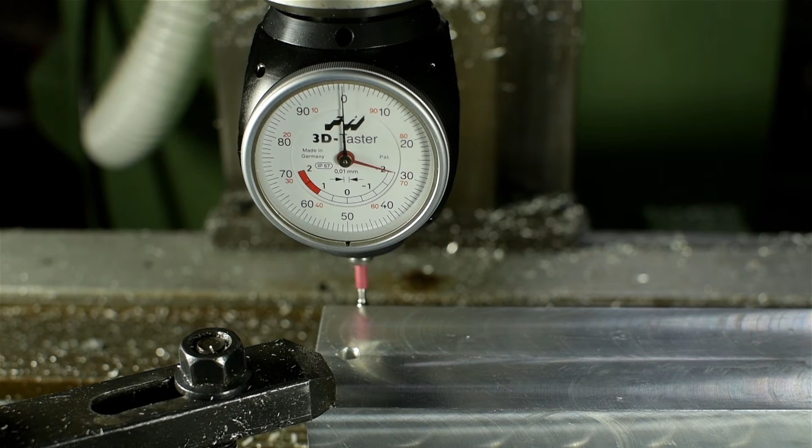Forget everything you think you know about working in the shop, because today I've got something that'll... No, wait. Scratch that. Don't forget everything. That could be dangerous. Let's start over. I've got a story for you. Intrigue and adventure, of betrayal and redemption, of love and...

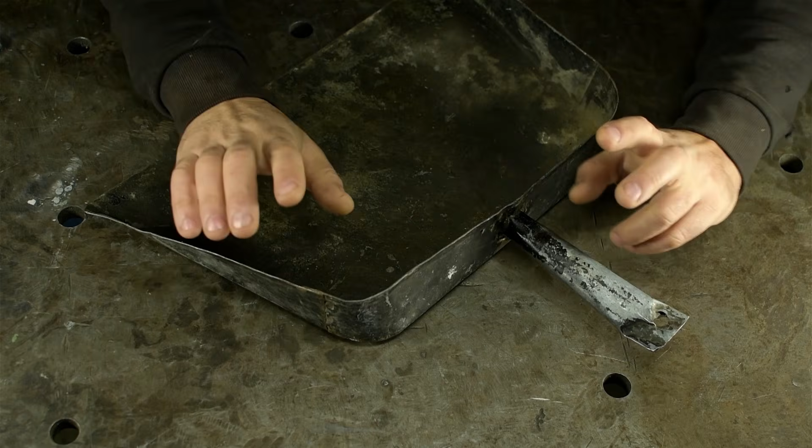It all starts with this very suspicious dustpan. And by suspicious, I mean not suspicious. I know, hard to tell just looking at it, but I made this thing a very long time ago. 10 years ago, maybe even 15. Sure, the handle's all crushed now and it's all dinged up. But when it was new, it worked great. I'd venture to say better than great.

Though, to this day, I still have no idea what on earth drove me to make my own dustpan and not just buy one. But, other than probably the half a day and $20 in materials it cost me to make, I don't regret a thing. Recently, I've noticed my garage hasn't been the tidiest. Frankly, it's a downright filthy mess. Now, at first, I thought it was the 15 simultaneous projects I have going on, or the fact that I don't clean up after myself.

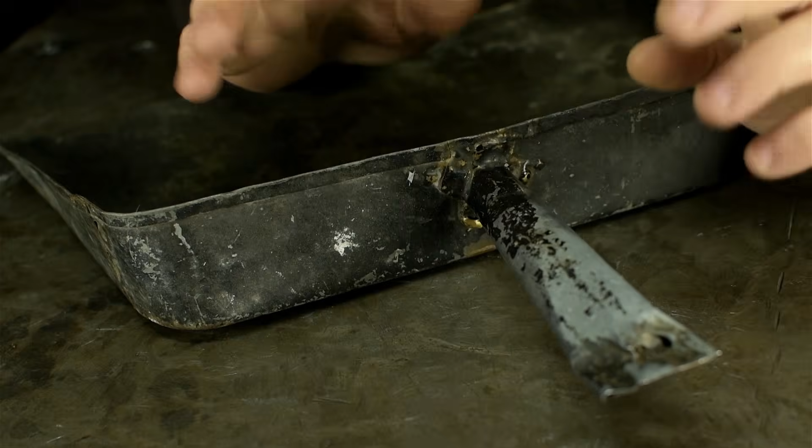But then, one particularly drunk Friday night, it dawned on me. My moment of clarity. My dustpan must be worn out and just not panning as well as it used to. Think of it this way, I've probably gone through 10 brooms since I made this thing, but never a new dustpan. It's simple math.

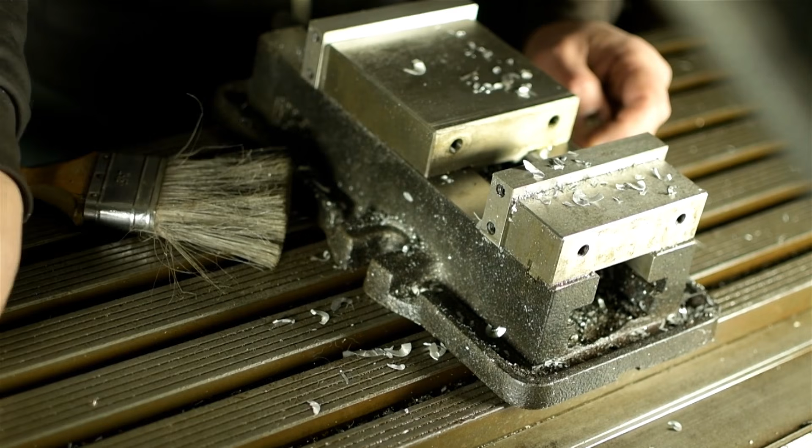According to my YouTube analytics, most of you might not remember this, but there was a time, and I'm not trying to be that guy, there was a time maybe 20 years ago or so when there was no internet. Well, a little bit of internet maybe, but it was for squares. Back then, there used to be these stores filled with books. If memory serves, they called them bookstores. Sure, there are still bookstores today, but they're not really bookstores like they used to be. They're more like cafeterias with really good waiting rooms.

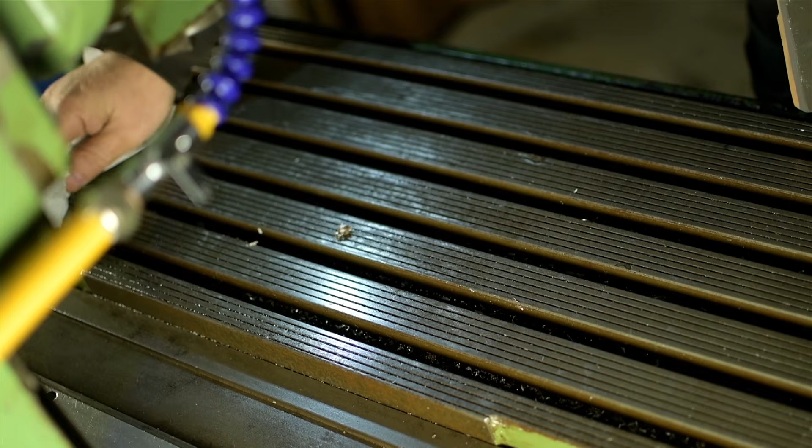The bookstores I'm talking about, you couldn't eat in. And drinking in one? Barbaric. If you wanted to drink something and read at the same time, you'd have to go to a 7-Eleven. And even there, you only had time to check the centerfold before they realized you were underage and kicked you out. In these bookstores, I'd usually gravitate to the same section. Well, after I checked if they had anything new in the fine art chapters of the photography books. You know who you are.

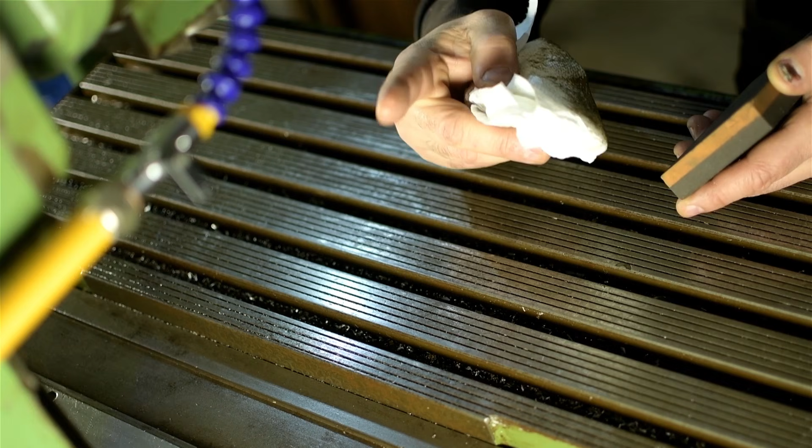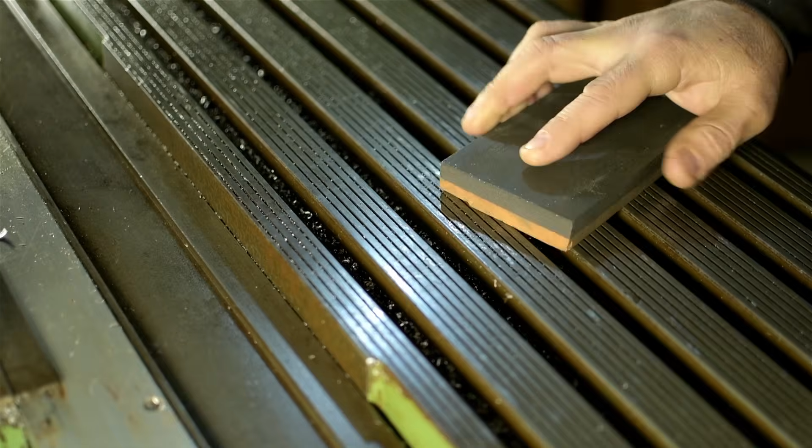I'd always end up in the science and technology section. I say section, but it was really just 2 shelves near the floor, if you were lucky. And no matter which bookstore you went to, it was always the same 4 or 5 books. There was always How to Wire a House Without Burning It Down. Superbly illustrated, of course. I mean, cover-to-cover hand-drawn screwdrivers and green terminals and cross-sections of living room walls. So it was that book.

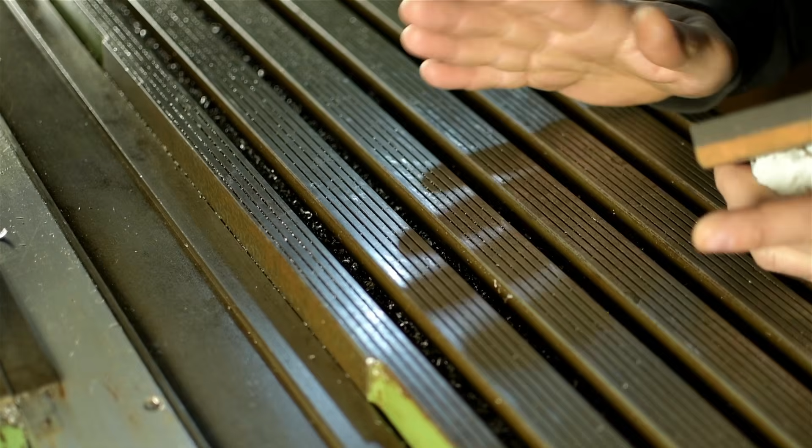Then there was like the pipe fitter's handbook or something that was 1,000 pages and $200. Who walks in off the street to buy the pipe fitter's handbook? Oh, and how could I forget? There was always one of those Richard Finch books on how to weld airplane fuselages with a gas torch in your garage. Chapter 1 was how to weld basically an ashtray for the butts of your used stick electrodes. Chapter 2 was building a roll-around welding bench. And Chapter 3 was the garage airplanes. Darn, I loved those books. I must own 4 editions of it.

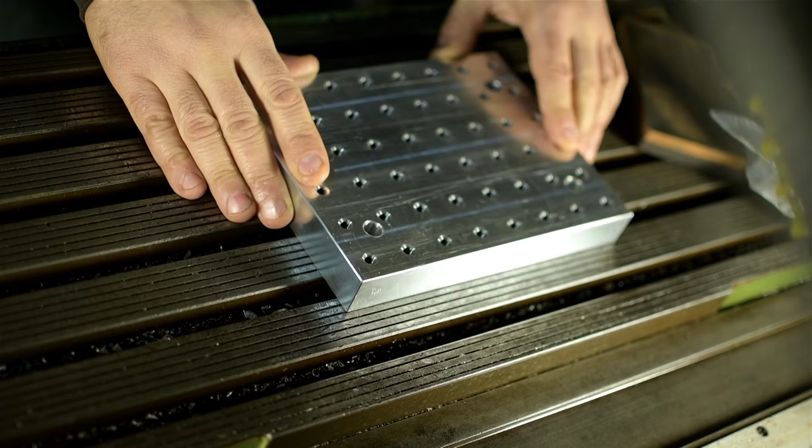But every now and again, you'd get lucky and run across a book by Ron Covell. Now, I appreciate some of you might not be familiar with that name. Ron Covell holds a special place in the metalworking mythos. He's like the patron saint of lost hammers. Ron is a level 99 hammer-forming sheet metal wizard. And I was about to put this on upside down.

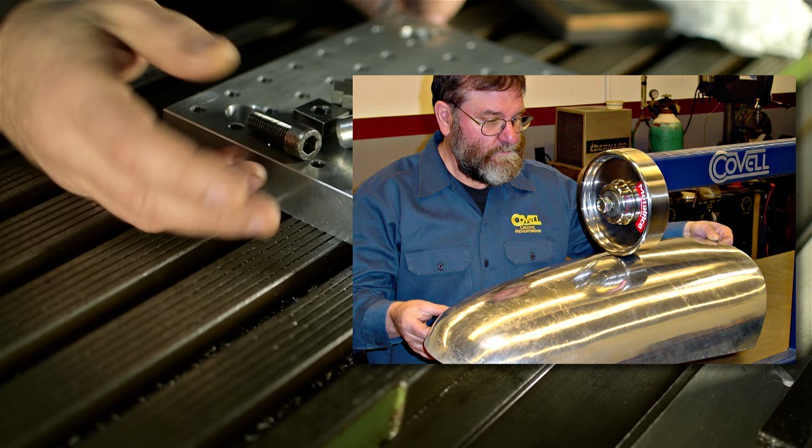His books and videotapes show you how to make giant pasta strainers, comedy-sized cigars, slugs to trick the pinball machines, avant-garde coat hangers, the craziest stuff with nothing but a flat piece of sheet metal and a hammer. Until I discovered his books, I really thought you needed a 100-ton industrial press and very expensive tooling to make giant belt buckles. I'd thumb through his books with my jaw on the floor.

Full disclosure, and my apologies to Ron, I never actually bought one of his books. But in my defense, what he was doing just seemed impossible and way outside what I would ever be capable of doing, which, fun fact, is what impossible means.

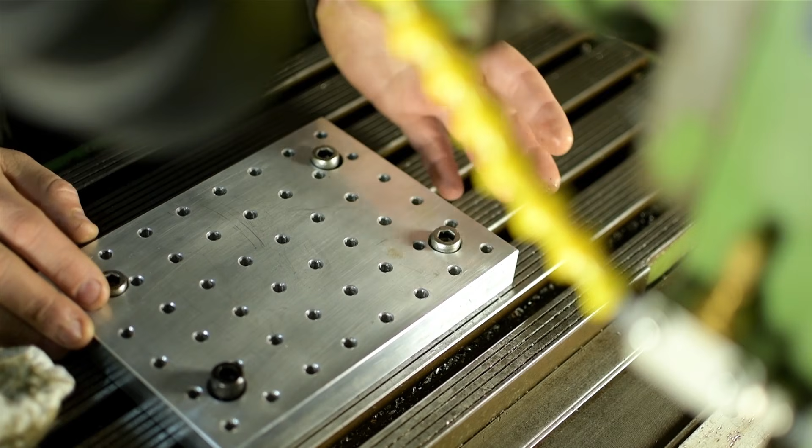Anyway, short story long, imagine my surprise when I discovered not only was Ron here with us on YouTube, but he also watches this channel. We got to chatting and, just as you might expect, we decided to build dustpans together.

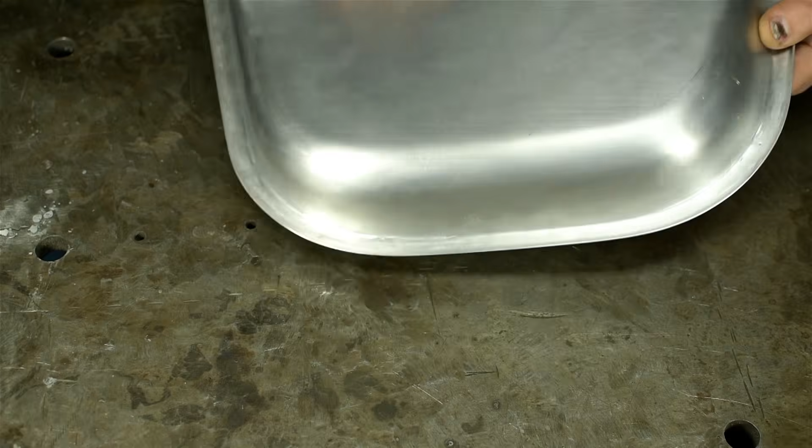Just have a look at what he sent me. Is this thing gorgeous or what? You might not see it just yet. You may need some context. He crafted this out of raw flat sheet metal, one hammer blow at a time. He hasn't released part 3 yet of his build series. There might be some welding involved. It's hard to tell. I guess we'll find out together. But just look at this thing.

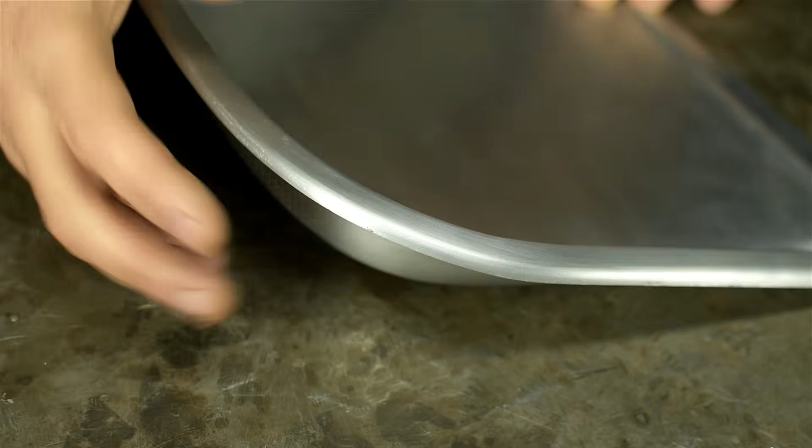As soon as I got this, grinning from ear to ear, I skipped across the room to the phone and gave him a call. I said, Ron, really love the pan. Work of art. And don't mean to sound ungrateful, but you forgot the handle part. He walked me through it. Turns out I'm making the handle part. I was so embarrassed. So here we are. You're caught up to speed. I'm making 2 handles, one for him and one for me. Let's get to work, shall we?

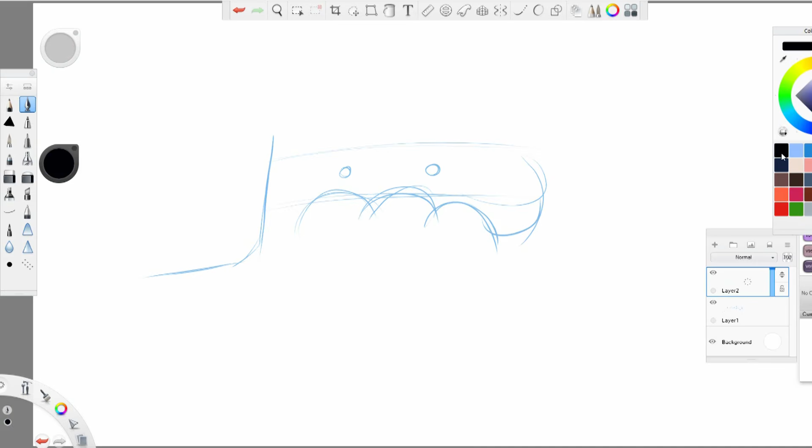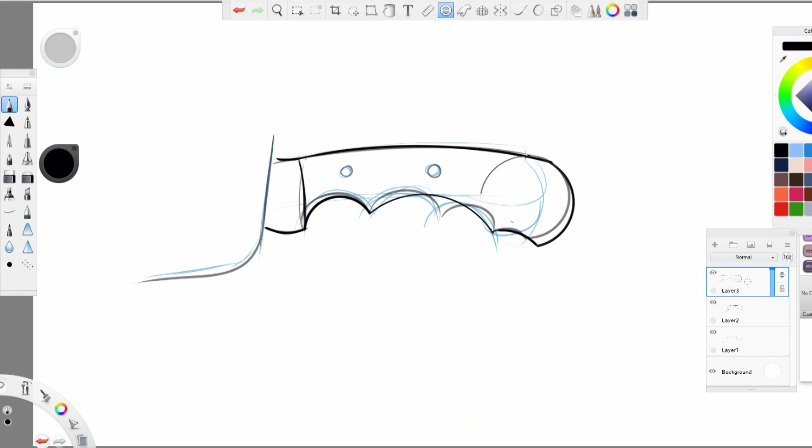The standard go-to in a situation like this is a good old piece of broomstick with a nail in it, right? And since this is Hollywood and all, maybe I'd get a little fancy with an electrical tape kung fu grip. But would you believe my luck? All my broomsticks aren't even sticks. They're cheap vinyl covered tubes. I'd stand here and tell you I had a million other ideas for a dustpan handle, but I just kept coming back to some sort of Bowie style knife handle. This is me winging it.

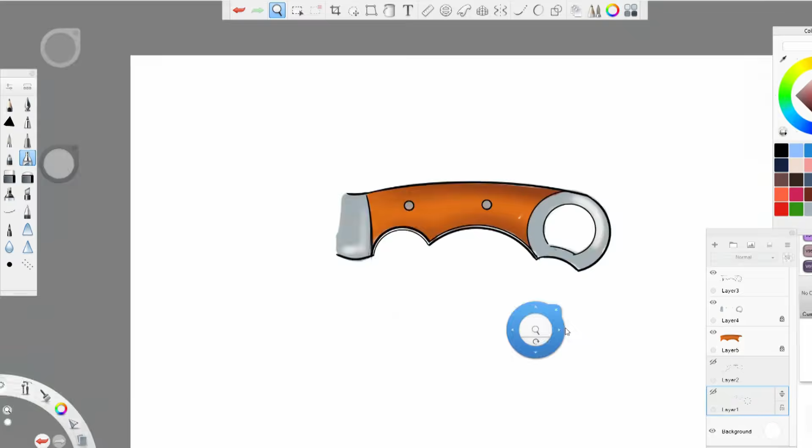I like to start with something of an underlay I can CAD over. I know someone's going to ask, this is Sketchbook. It's my favorite free drawing software, though it is from Autodesk, so you know. Just kidding. This used to cost money, $100 thereabout, but they give it away for free now. I really should make some time to call them and say thanks. Now we're in SolidWorks, which isn't free. What's up with that, SolidWorks?

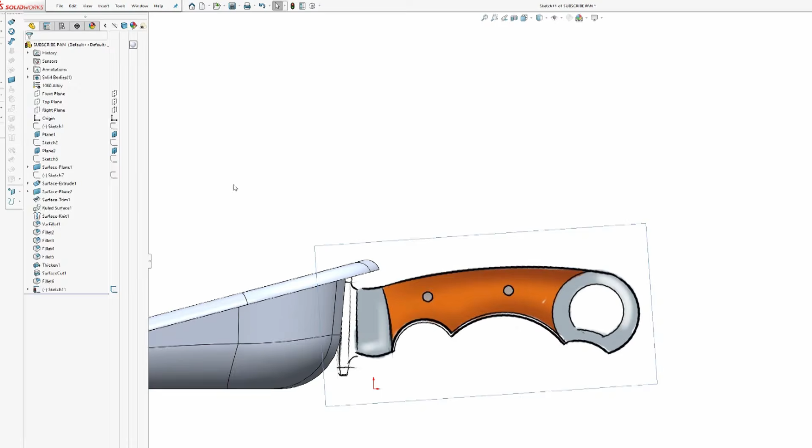I've already modeled in a rough approximation of Ron's dustpan so as to have some context. And speaking of context, let's drop in that handle sketch. Scale and rotate it to something that looks about right. Next bit I'm going to fly through. It's a matter of getting that sketch into 3D so we have something to feed the CNC machine. Everyone's got their own way of doing this. And what you're seeing is a mishmash of 2 or 3 refinements, trying to get the surfaces right. Though in CAD, it's always hard to tell what's right.

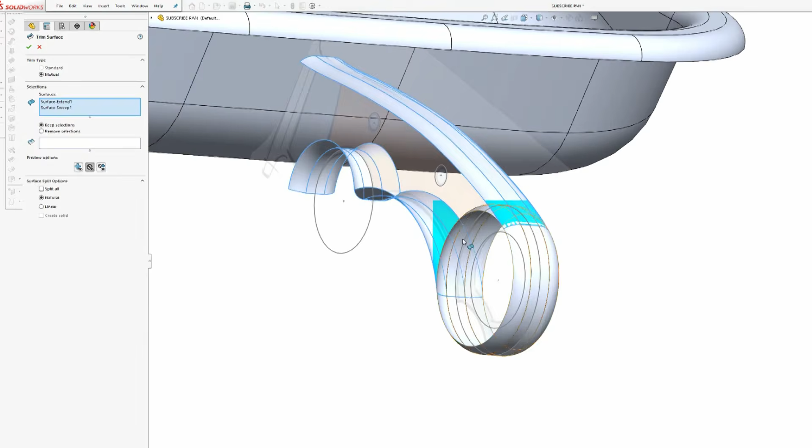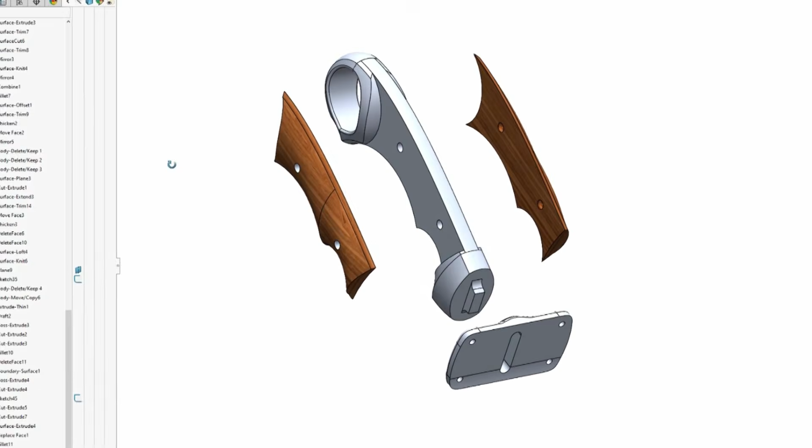I did go in a couple of times and plump the surfaces up a bit, so the end product hopefully would be more handily. Be comfortable to hold and look right on the dustpan. And I settled on this, 4 parts. The handle core, some wood scales, and a mounting flange. I should add, at this point, a more rational person might perhaps print this out and bandsaw it out of some scrap wood. Or heck, maybe 3D print it. Sort of test fit it before committing to a lot of work. But I just jumped into CAM.

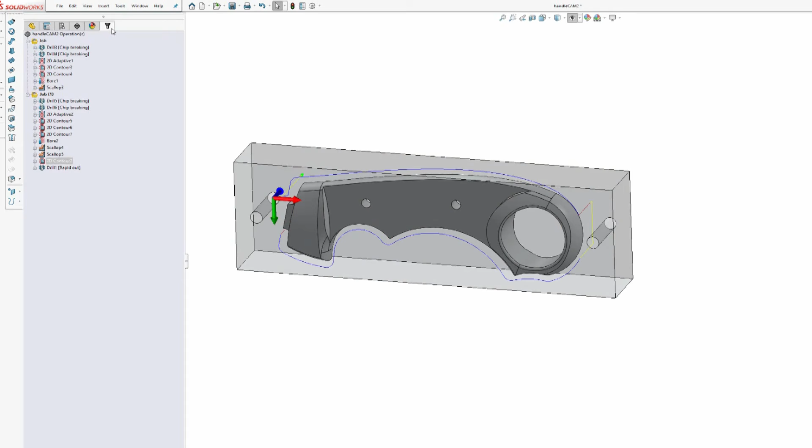This is just the handle core, but all the parts were exactly the same. I created a block, that thing you see in transparent. That would be my rough stock. That's what I'm going to carve that part out of. Then each part got 2 jobs or setups, one for each side, to rough out the bulk, clean up the flat areas, and then 3D cam the more complicated ends. Once happy with those cam toolpaths, I exported them to a thumb drive.

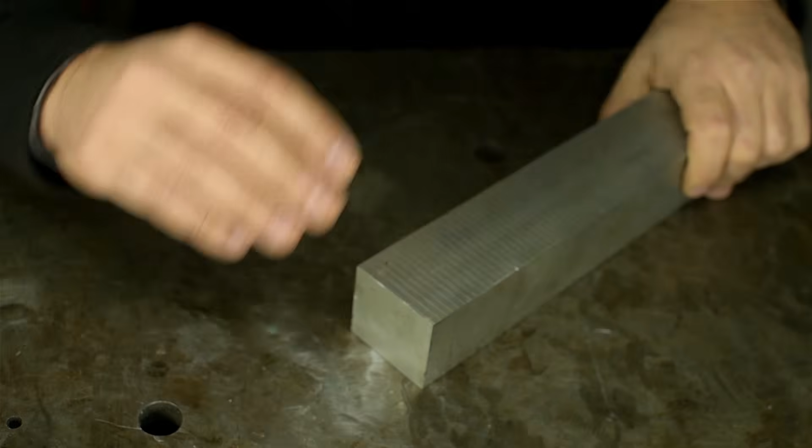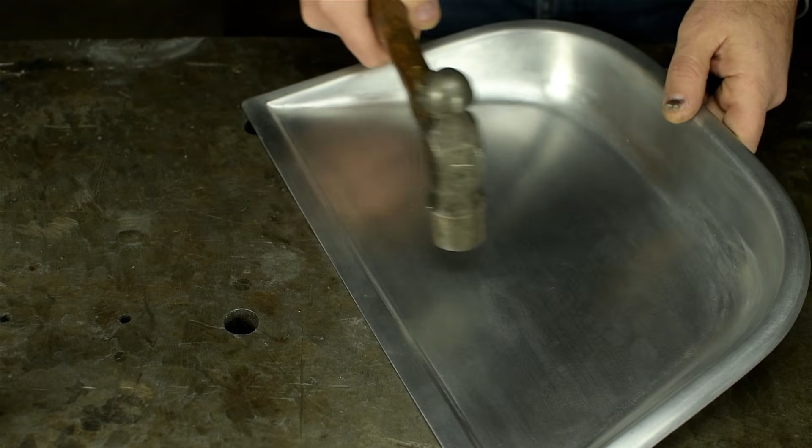Before we can do anything with this though, we need to prep the stock we just saw in CAD. The dimensions of which are very important. Well, sort of important. Fine, the thickness is important, since we'll be flipping this stock to get to both sides of the part. Bear with me just one moment. Oops, sorry about that.

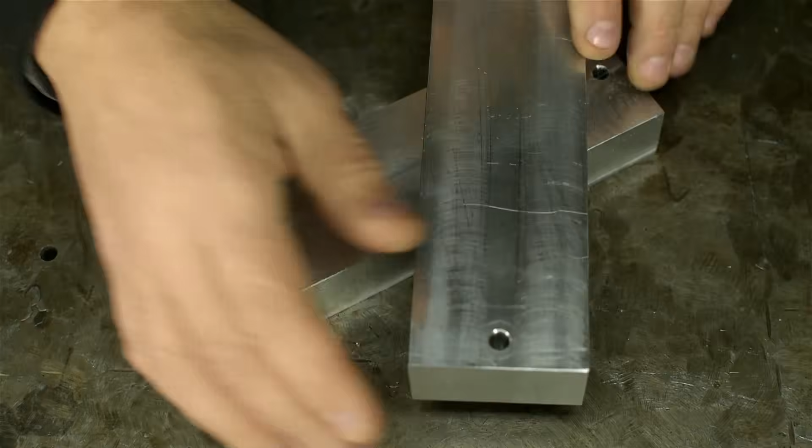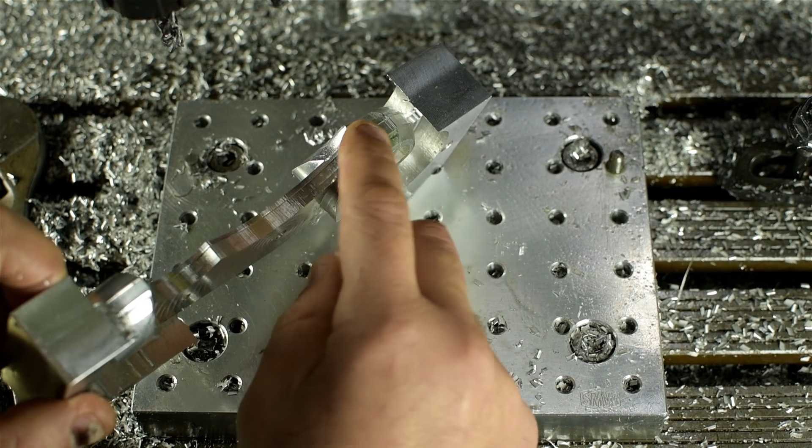You know, I think that came out pretty all right. The two sides appear to have matched up pretty good. There's a little extra material around the perimeter, to give me something to hand finish. I want this to be a complete round from one side to the other. Yeah, maybe a tiny bit of mismatch, but I can live with that. I think the real miracle here, though, is not having cut into my fixture plate.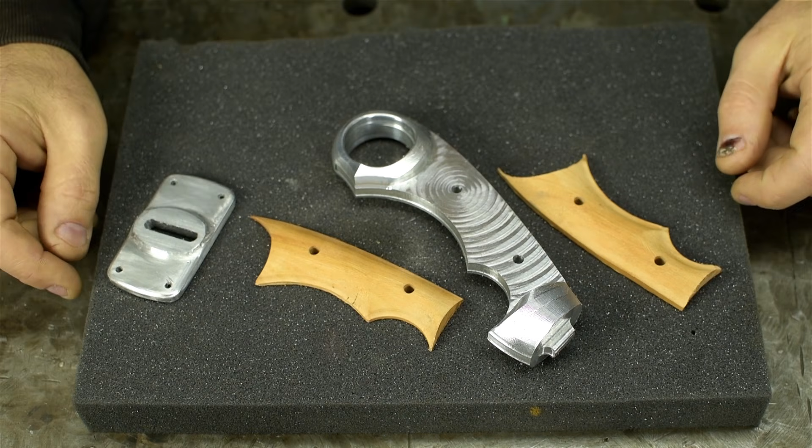And just like that, all the parts are done. CNC is amazing, isn't it? Just turn the machine on and off it goes. Pretty much happens all by itself. There's the actual handle, the core, I guess, the spine, whatever it's called. I also cut 2 scales. They fit as you'd expect. These parts all still need finishing. That's what we'll be doing next. But I'm happy with how these turned out.

And no, these aren't painted. That's their natural color. That's woad. Wood? I'm not sure how you pronounce that. This variant happens to be cherry. Cherry as in the type, not as in quality. Though they are pretty cherry if I do say so myself.

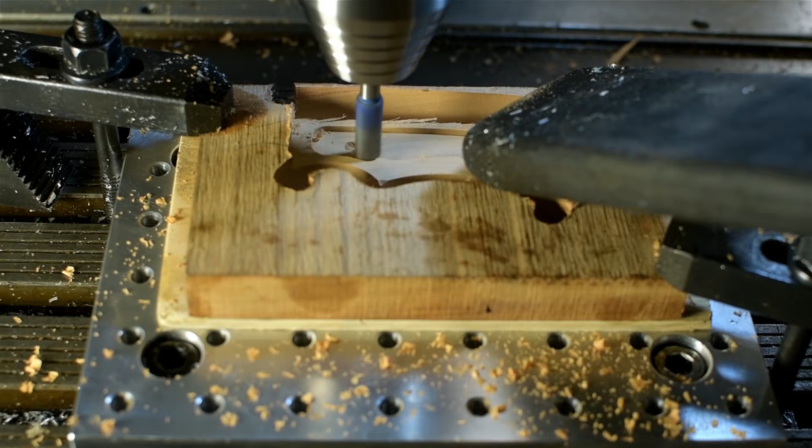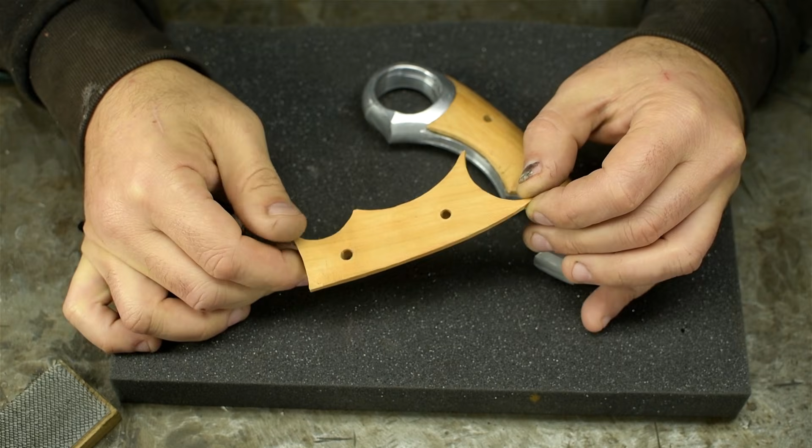Machined these just like I did the spine. Clamped down the piece and let the mill go to town. Only difference is these are one-sided, so they're easier. I sort of planed the back down a bit so it's nice and flat. But the machine is cutting these almost down to final size. I used cherry as that is the traditional fruit wood for dustpans. You know, like hammers, you'd usually use ash or hickory or something, because they're the most hammery woods. The most dustpan-y is cherry.

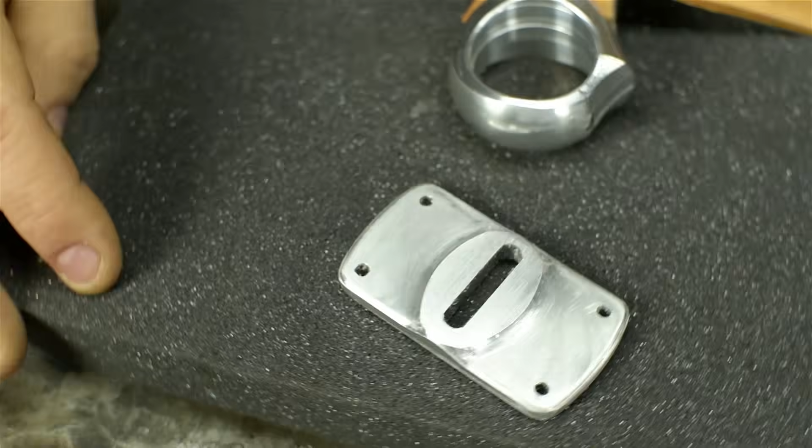And finally, of course, we have the cross guard. This will be the mounting flange that fits to the pan. I already gave this part a shot of sandpaper, which is an excellent segue to finishing. Although pretty cool as far as CNC goes, these are rather roughly finished. And that was by design. I mean, there are usually always tool marks to be removed, depending on the look you're going for, function of the part. But this is a step removed from that. In programming these, I opted for a coarser step over, in exchange for the hand finishing I'll have to do now.

As you see them here, these parts took about half hour per side on the handle, so maybe an hour machine time there. The MAHO isn't a race car. Maybe 20 minutes each side of the scales, mostly because I started with some thicker stock and had to work my way down. And about the same for the mounting plate, maybe a little more, 30, 40 minutes. This is 2-sided, so I had to flip the stock and work from the back too. All told, on paper, maybe 2 or 3 hours of machining time.

Practically speaking though, that took about 2 days. By the time you get everything set up, break a few tools, clean up between setups, walk the dog, have some coffee, look for step clamps, look for bolts, get everything aligned. It turned into 2 days, but I'm getting off topic.

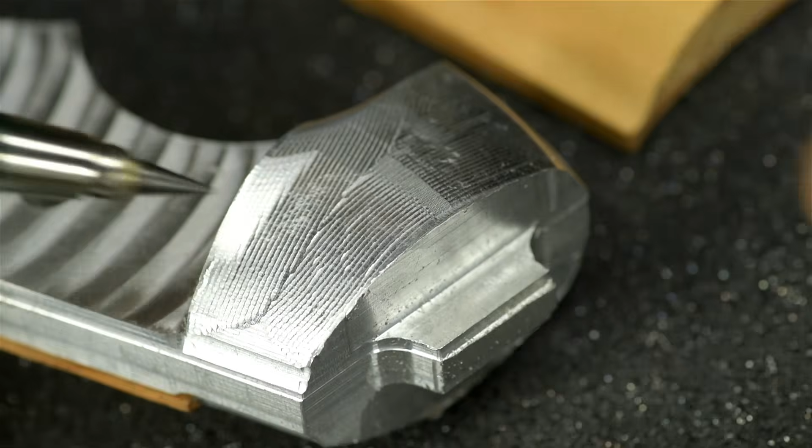If we have a close look at the handle, though all parts were done the same, I have about a 40 thou step over, about 1 millimeter. That's on a 1/4 inch ball nose end mill. And I didn't let the tool path come all the way down to the side. That's mostly because of the way I was holding this.

Had I gone to a finer step over and wrapped that tool path all the way around to actually finish the part, not to mention having to position this part 4 times to be able to machine it from 4 independent sides, this part would likely now be done. Require very little finishing. However, the machining time would have been through the roof, probably 5 hours per side. I'm making that number up, but it'd be a lot.

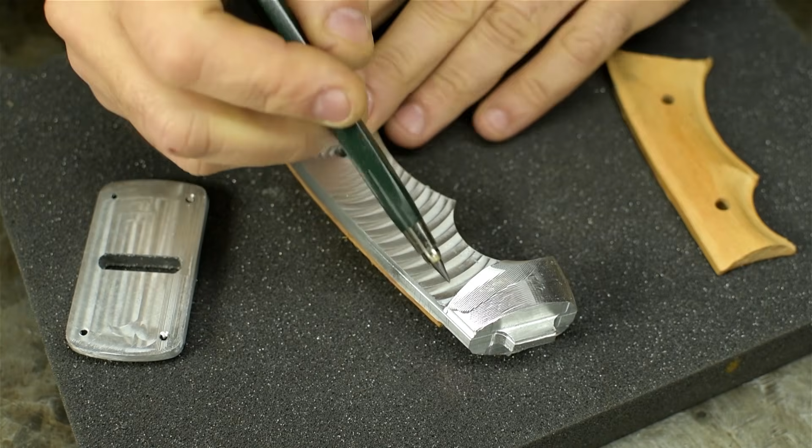Since I design these parts and have full artistic and legal control over how they look, I figured I'd just get the mill to do the brunt of the work and I bring it home with a file. Being aluminum, it's not that big of a deal. We just have to be careful. So now, the next step, I want to get all these parts to go from this finish that we saw up close just a minute ago to this finish. Okay, well maybe just a touch better than that.

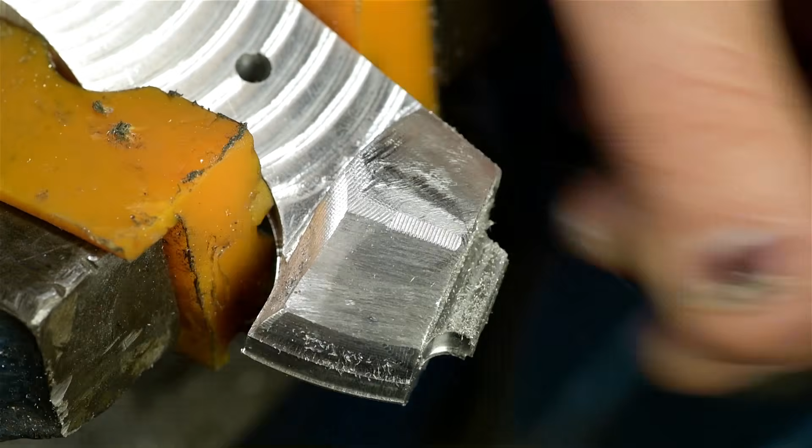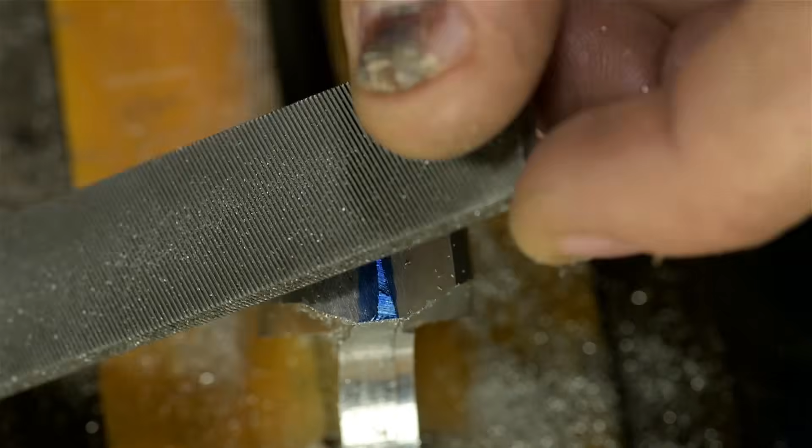Frankly, there's not a lot to this process. It's all about paying attention to what your file or sandpaper or whatever is doing and course correcting between each stroke based on what you see. Again, I have the advantage of having designed the part, so I already went through and am familiar with building the surfaces in CAD. I know where the curves are, or where they should be, where they should start and end, and where the clean break lines need to land. Had this been someone else's part, I'd likely be using things like calipers, maybe radius gauges to massage the part to the right shape and size.

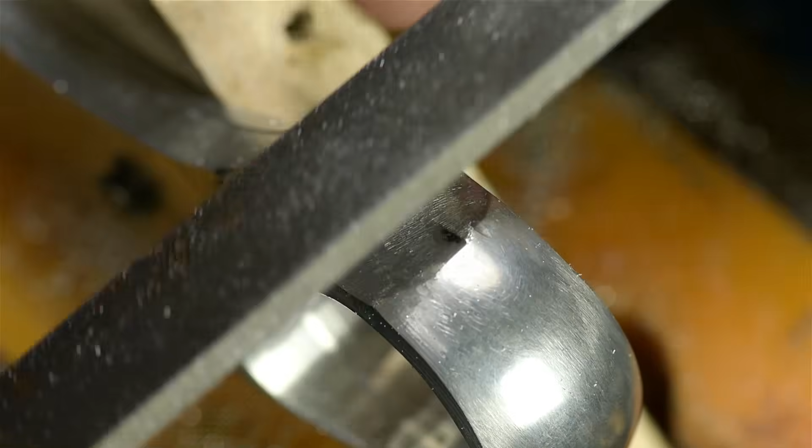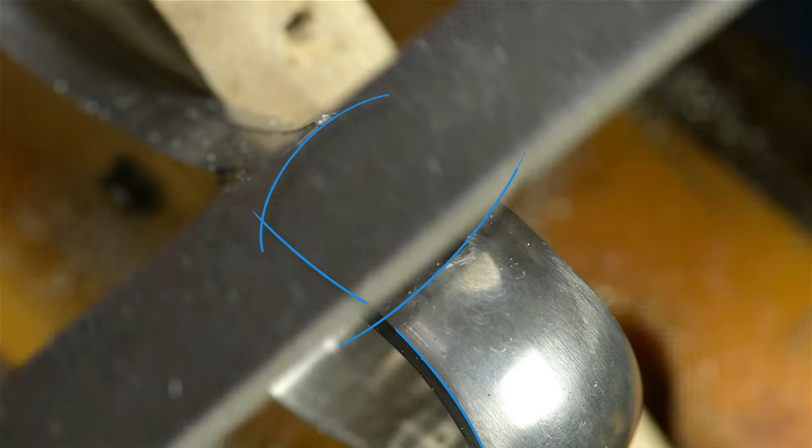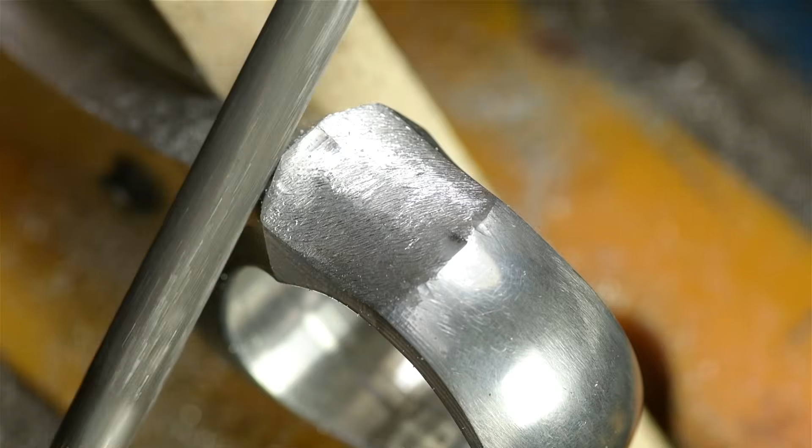First step though is to establish the basic shape. I'm using a flat file, mostly the corner of it, and a round file, the corner of that one too. I'm removing the support material that held the part in the milling setup and cleaning up each facet or face, paying really close attention to the surface breaks, where one face meets the next. I want to keep those sharp lines. They're very important to the look. If for some reason I accidentally file those off, well, I'd have to step back and maybe reevaluate just how important they really are, or were. But for now, anyway, I'd like them to stay important.

Anyway, what were we talking about? Oh yeah, I am so afraid to touch this thing. I forgot just how much of a scratch magnet polished aluminum is. I had it to a mirror finish, installed the scales, and gave it a wipe down with what I thought was my cleanest microfiber cloth. And now this thing looks like it's been in a bar fight. Ron, I don't know if you're watching, but when you get this, be careful, okay? Don't get it near any dirt or dust or anything.

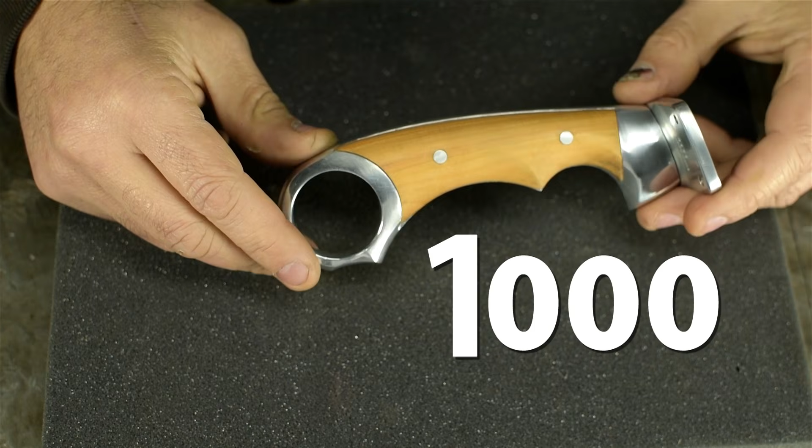The rest of this story is pretty standard fare, so I'm going to rush through it to make my deadline. After all the filing was done, on the aluminum I tucked in with some sandpaper. Started at 200 something and slowly made my way up. 400, 600, etc. With each step being careful to remove all of the scratches from the previous step. So you're not done with the 600 until you see all the 400 grooves gone. Now, you might find this hard to believe, but I made it all the way to 1,000. Just to put that in perspective for you, I only packed up to 800 for my honeymoon.

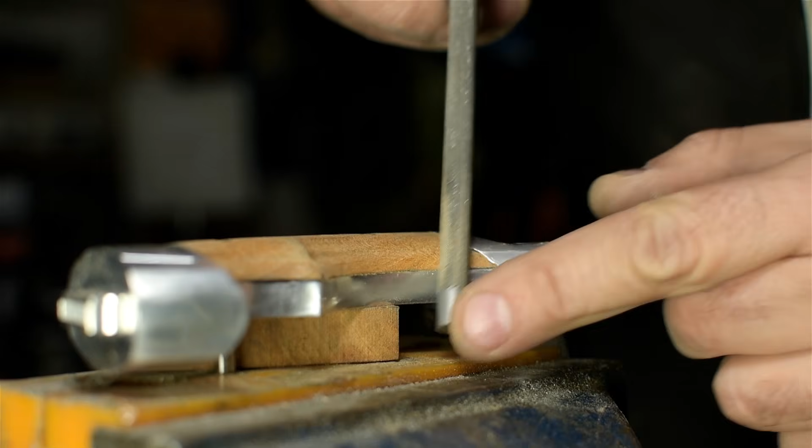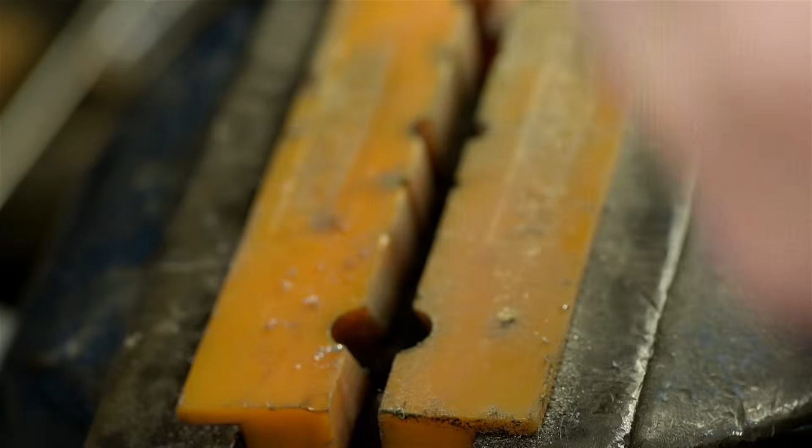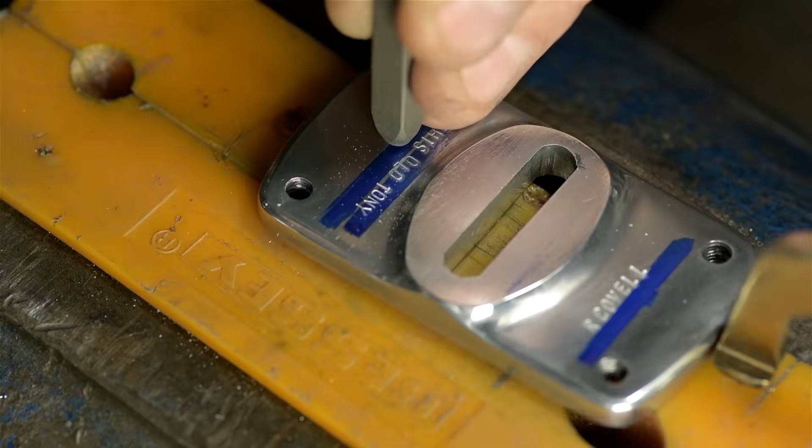But after 400 or so, I stopped and started to bring in the scales. Same story here, just laid them in the handle and brought them in with a file. The CNC was very close, of course, but I left a little extra material and I had to clean up the tool marks. Ditto for the crossguard, except here I had to stop and add some tapped holes. I emailed Ron yesterday, asked him what he preferred. He said his absolute favorites are 8-32s. These holes are what we'll use to attach our dustpan bodies. Finally, and probably the scariest step, welding the crossguard to the handle.

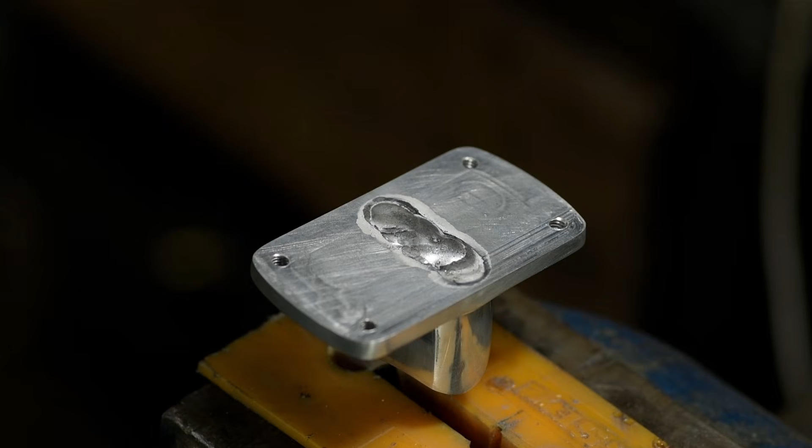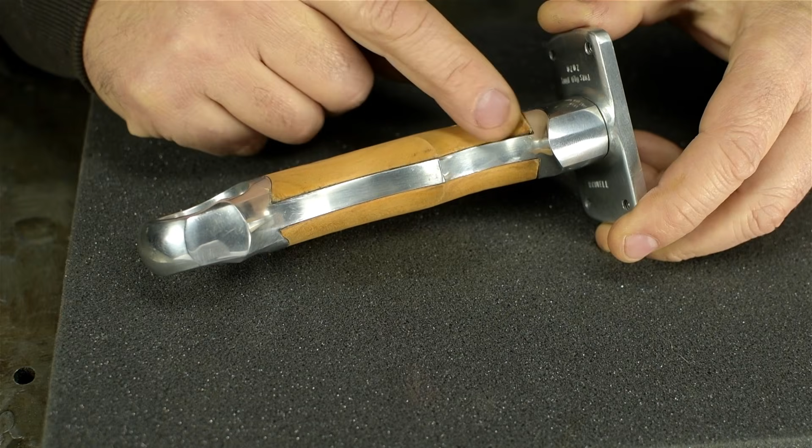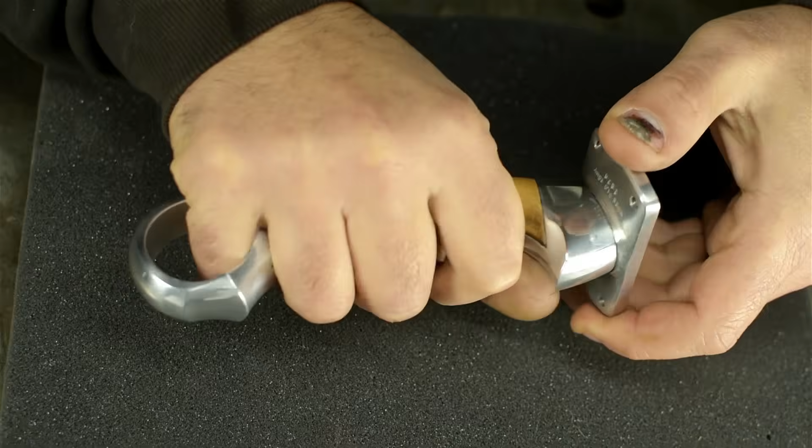And that's it, I think. Lots of buffing and polishing. Some of the sharp corners on the wood scales chipped out. I should have seen that coming. Those got pretty thin. But, you know, adds character or something. I could do a bit more work, clean it up a bit more. Some of the end grain in this cherry has gotten dark. But, well, you know what it's like when it comes to making dustpan handles. You're just never really done, are you? It is a weird fit if you try to hold it like a knife handle. Not exactly sure how you'd hold on to this thing. But in use, I'm sure any normal person would just pick this up by the end, like a dustpan.

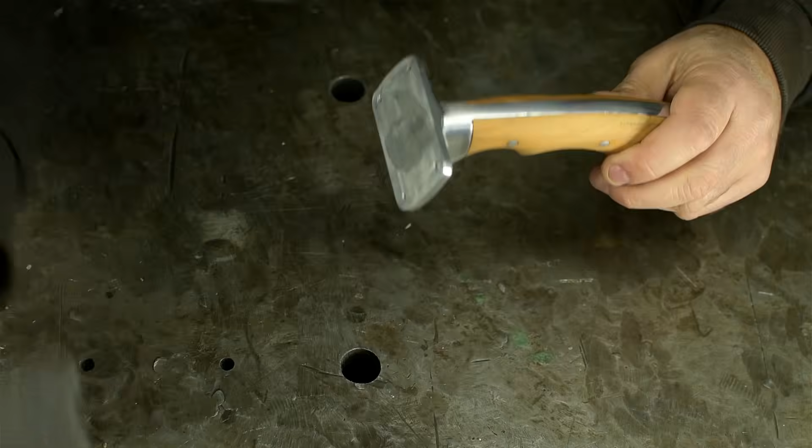But before he can do that, I've got to get this to him ASAP. And in this case, I don't think traditional shipping will do. All right, let's see if this drone still works.